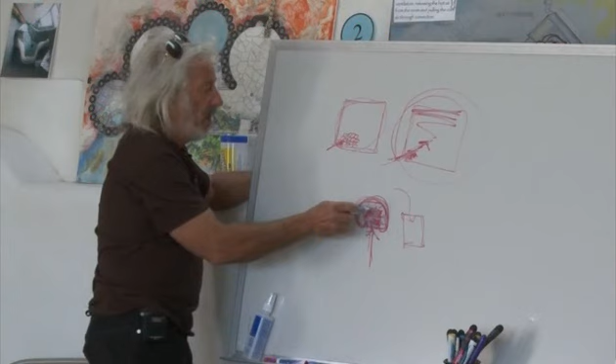The mass thing kind of came out from the physicists in the early 70s when we had the first hint of an energy crisis. All the engineers and scientists were trying to build mass into houses. We were already fooling around with building houses out of beer cans, so we looked around at what else there was a lot of on this planet, and it was tires. And we started stuffing dirt into tires and then beating it into tires.

And so you have a tire that is a steel-belted rubber casing, and you beat it full of earth. You have a 2.5 foot thick chunk of mass encased in steel-belted rubber. The material that you're using is dirt, which is everywhere. Tires are really everywhere. Tires are indigenous to the entire planet. If you came here from another planet and saw all the tire piles, you'd think they grew here just like trees. And in fact, they do.

I mean, we've been everywhere. Bolivia, India, everywhere we go, they've got tires, just like they have trees. So they actually have a problem with tires. You never hear anybody saying there are too many trees, but you do hear people saying there are too many tires, and too many people probably. But anyway, tires are indigenous to the entire planet. They are a great, massive way to build. They're low tech. They don't require equipment. They require very little training.

So when we were trying to evolve a method of building a mass building, we stumbled onto this, and that was 30 years ago, and we really haven't found anything better. In other words, if I found some better way to achieve a massive structure, I would use it immediately, but I haven't. And when you put all these criteria together, it's really almost unbeatable. The fact that they're indigenous to the entire planet, that it's low tech, that it's getting rid of something that we have a problem with, that it is structurally super.

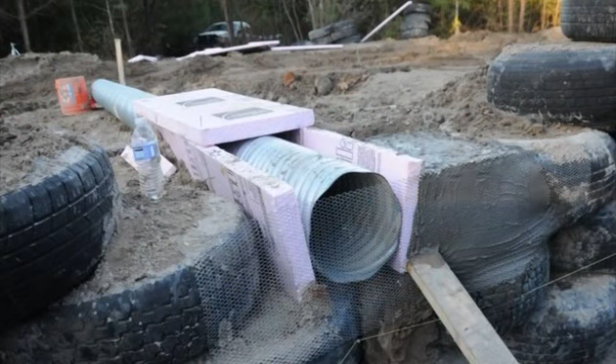And people would sit around this at lunch because they're coming in from working outside in 105 degrees, and sit around these tubes and put their bottles of water in them and all kinds of stuff. You could see it was working. And this is with no fuel. So now we've taken this configuration that we got busted for a decade or so ago and taken it further, removed the heat loss of the skylight, created even better ventilation, and done one more thing.

We do now what we call a thermal wrap, and you can see this. I think we've got one under construction called the Global across from Corner Cottage. Thermal wrap is we take rigid insulation and go out another 3 feet from the tires. And so now we have trapped more actual earth mass to work with the tires. The tires become the structure and mass, but we're adding another 3 feet to that mass

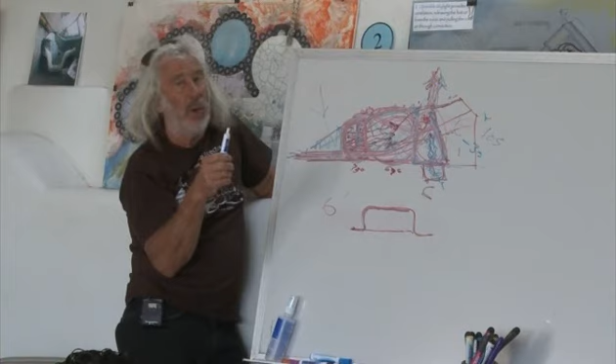And the reason we call it the package design is because it was so simple that we could provide a kit almost that people could just put together, and we could make components. So we were aiming at making this more user-friendly, because these older buildings had a lot of strange details that required more skill. So we were trying to make it so that you could just assemble this building. And they worked pretty good. We did a lot of them.

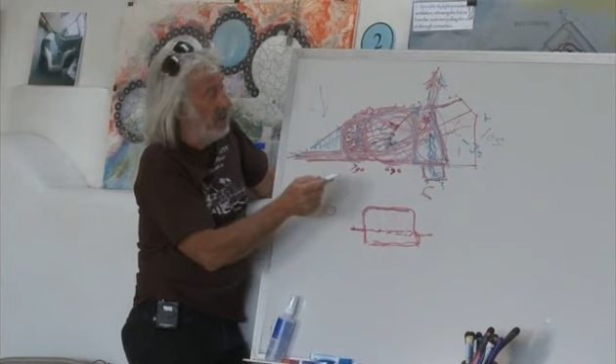And then we added a double greenhouse to it. And then we got rid of the sloped roof because we decided we could heat the roof with solar rather than having to have it shaped to face the sun. And so the package then evolved into a double greenhouse package, and that evolved into what we call the global Earthship, and we've got a lot of these going around the world now.

And we can do one of these, like we just came back from Miles City, in Montana, where we put one up in 8 weeks, totally turnkey, everything working, 2-bedroom. And so we got the time down, we've got it to the point where this is a product now that we're ready to take out there.

There are 6 points to these buildings, half of which at least I'm going into tomorrow, but everybody's looking at carbon zero these days. And so building with recycled materials is a huge thing. That's part of the rationale for using tires, but not the only rationale for sure. And the cans and the bottles. We were doing that before we were doing anything.

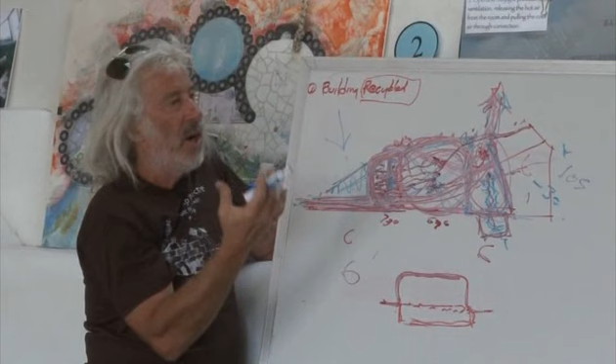And building buildings out of cans just because the media started screaming about garbage being thrown everywhere, 30, 40 years ago, and it hasn't stopped. So we were doing that before recycling was even a word. So in terms of a carbon zero building, if you're using a material like tires or bottles or cans that is taking the place of a manufactured material, and that manufactured material takes energy to manufacture, you're starting off with a material that doesn't have to be manufactured.

There's a double thing there. It also takes energy to do something with the cans and tires and bottles. So you are getting rid of that energy because you're using them rather than using the energy to get rid of them. I was in Norway recently, and they have a giant recycling company, but the energy that is used to recycle all these materials is unbelievable, really. And then they ship them somewhere.

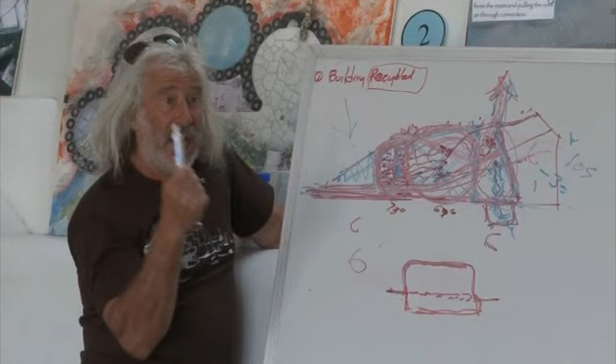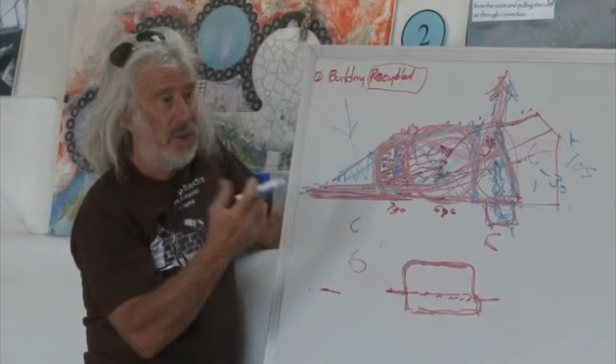So you're taking the place of shipping because you're using a product that's laying around. You're taking the place of manufacturing because you're using a product that's already manufactured. And you're taking the place of disposing of garbage because you're using garbage. So there's 3 ways that these buildings start off with actually a negative carbon footprint when you're going out there and pounding dirt into tires. So it starts off with a negative carbon footprint because of building with recycled materials.

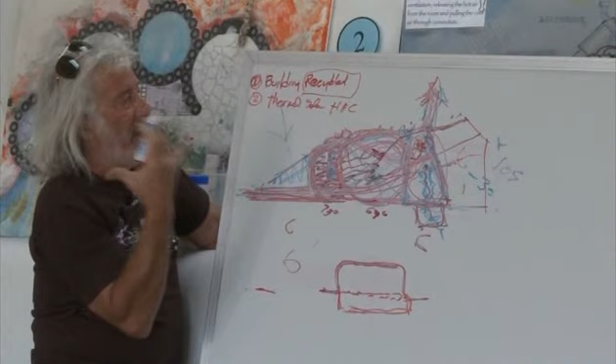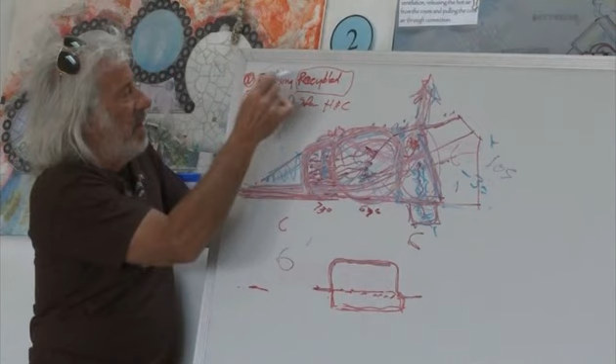Then thermal solar, which is what I've just been talking about, heating and cooling. These are the major points of these buildings. Thermal solar heating and cooling, building with recycled materials, and so the design of the buildings is a result of what it takes to use recycled materials and what it takes to achieve thermal solar heating and cooling, and you can see how it's evolved. And then solar and wind energy, of course, which we'll go into tomorrow. Water from the sky, harvesting water.

And then contained on-site sewage treatment. Contained sewage treatment. And so this is getting you off of the grids. And sewage treatment is getting to be a big deal because they kind of halfway treat it in sewage treatment plants, which again takes a lot of energy. And no pun intended there.

So it takes a lot of energy to treat sewage, and sewage is a valuable thing. Sewage to me is gold. It's compost. It's providing energy for food, which is the sixth point, food production. So if we can make a building that addresses all of these issues, who needs the government? Only to hinder us from doing it.

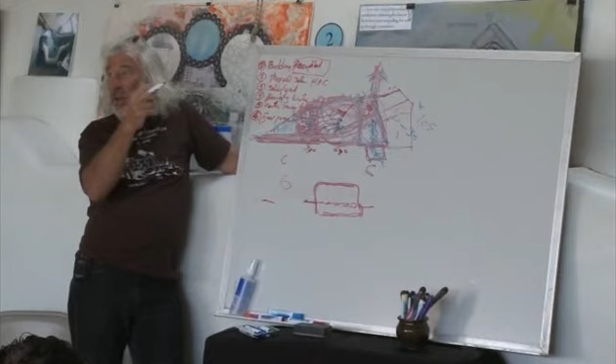Doesn't it also regreen because the black water plants grow that wouldn't normally grow in a... Yeah, and you'll see, I don't know if Kirsten had it in the slideshow, but if you get to see some of the older Earthships, I have a great picture in one of my shows that shows one of the buildings here, and you've got the barren, deserty mesa, and it might even be in one of these posters, but his blackwater system, which I'll go into tomorrow, has just gone off.

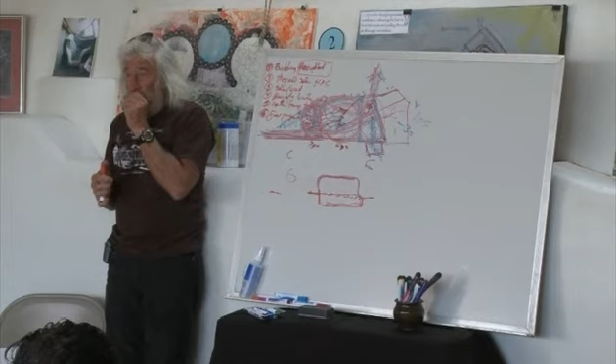It's like a big oasis of green with birds and owls and creatures living there, and then you see the periphery, all the barren mesa desert. And so these buildings actually cause green to happen. And that's because they don't throw their sewage away. That's because the sewage is gold. The sewage can give you a green surrounding. So the regreening of it is definitely an issue.

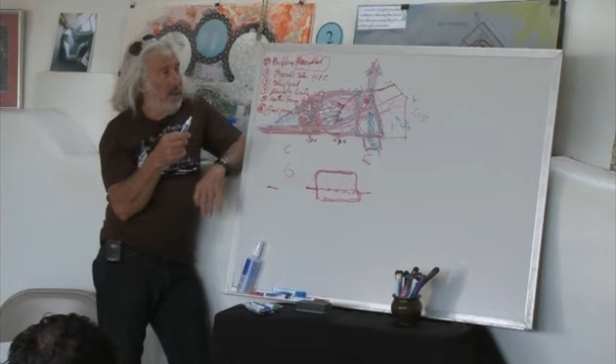But just think of this in terms of the issues in the cities and other countries. How much of a garbage problem there is. New York City's taking it out in barges and dumping it in the ocean. Everywhere I go, the first thing they do is they take me to the dump, and there's mountains of tires and bottles and piles of refrigerators and ranges and things like that. And we've got ways to use all of that. I imagine Kirsten showed you how we use the washing machine refrigerator panels. That's new in the last 4 or so years.

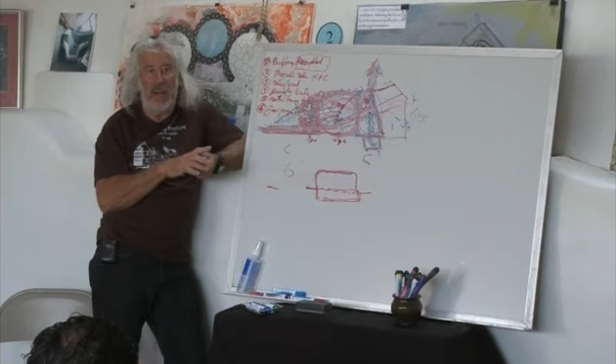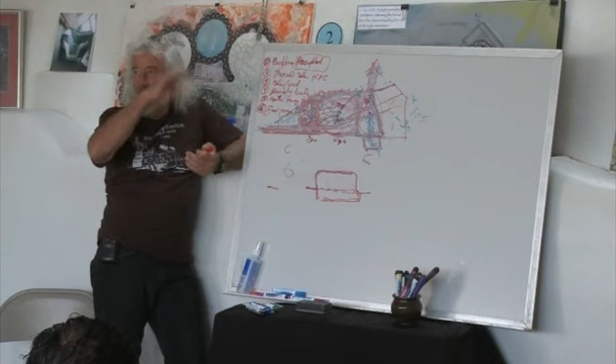I was in Hawaii, talking to grade school kids, and they took me to the dump, of course. It was the little island Molokai, and there's where I first got this idea. There was a big mountain of refrigerators, ranges, washing machines, appliances that went bad. And we had been switching our roof material to metal because metal catches cleaner water. And this mountain of washing machines, they're all full of these baked-on enamel, yellow and green panels of metal. Nice colors and everything.

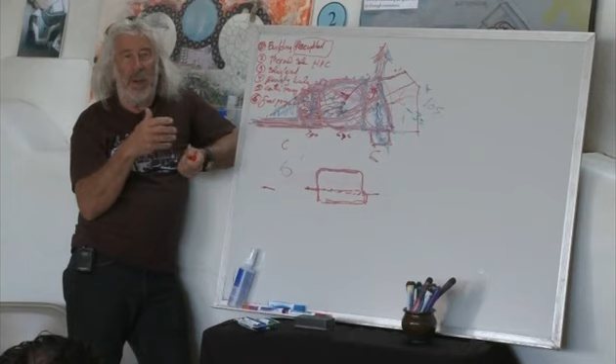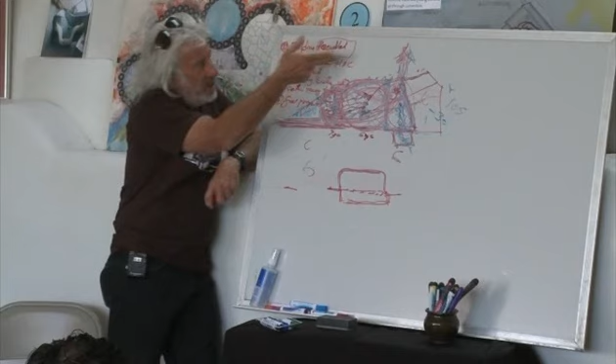So after I came home from that trip, we went to our dump, and sure enough, there was a mountain of refrigerators and ranges. So the crew went out there. We took a solar array and a solar trailer so we could plug in these electric snippers. If this is a panel on a washing machine, you just stab the corner of it, make a hole, take the electric snippers and snip, and you got a panel. So we just go to the dump and harvest metal. You'll see it at Corner Cottage across the street, the New Global has some of it, and the Phoenix has got the best application of it.

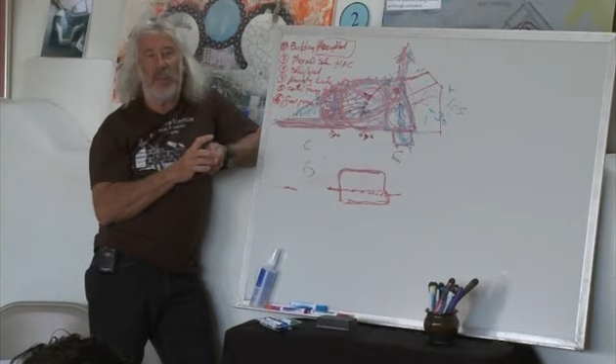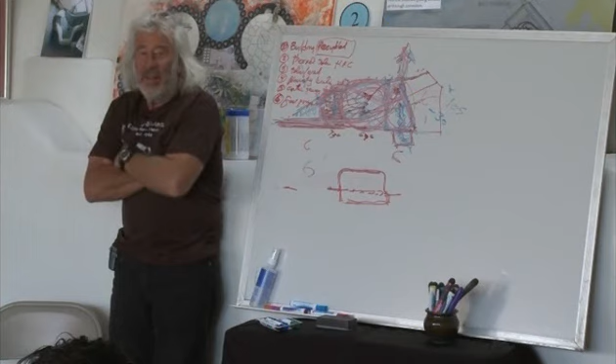It's like artwork there. As a matter of fact, I just got a 1970-something Mercedes that was all beat up, and we patched up the body with washing machine parts. It's beautiful. It looks like paint swatches that you find at the paint store. And then we found a couple of pink ones, and we really like the pink, so we paint some of the panels pink with metal paint. But anyway, we're harvesting metal now out of the dump for roofing.

And so every city and country has serious issues with garbage and what to do with it, and then when they do something like Norway does with it, to me that was scary. They had a factory of machines chewing up energy and trucks hauling it off to other parts of the world. To me, that was insane. They thought it was a great thing that they had such a giant recycling situation, but I was just seeing energy used like crazy to recycle.

All we're doing is gathering stuff from the dump, bottles, cans, tires, cardboard, washing machine parts, and we'll continue to find other goodies. So building with recycled materials is not just a logical thing. There's really good materials, and in fact, I can't find, manufactured or not, a better material than tires to build with. If somebody gave me $30 million and said, develop the best building material you can find, I'd probably invent a tire.

So it's like a super relevant issue that, aside from housing or anything, every city is dealing with. Well, then, of course, the energy consumed to heat and cool homes. Everybody probably knows that the CO2, I think they argue, between 30 and 50% of the CO2 impact is from buildings. And that's obviously largely from heating and cooling buildings.

And so if you're heating and cooling buildings with thermal solar and trying to come up with little tricks to extend that, which we're doing, then you're affecting that issue that every country and city is facing. Solar and wind for the electricity, which again is affecting, if you're replacing a coal-fired power plant or a nuclear power plant or whatever. Like when we were in Normandy, France doing one of these, they were getting ready to do two things in the neighboring area. And they were actually putting up signs and people marching and raising hell about it.

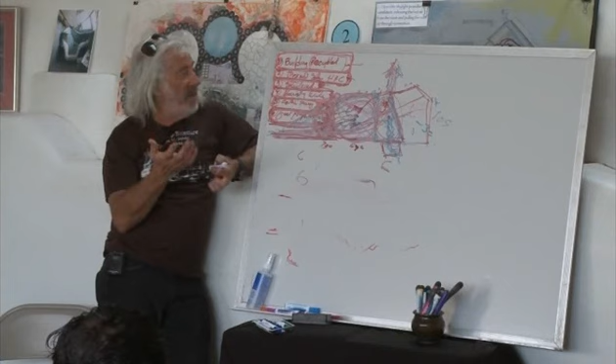Because Earthships are getting well known in Europe, with the websites out there and whatever. And so the people made the choice to take their lottery money and build a carbon zero demonstration pavilion. And it took them 2.5 years to get a permit. That's insane. So to me, this part is the fun part. We're getting it better all the time. It works good now. It's ready to roll. And where we're at now is getting it so that people can do it.

2.5 years for a permit. It took us 3 years to get one in Brighton, England. I had a guy work for 18 months. He came to me with an oxygen tank on his back. I thought he was going to die in the next week. And he worked for 18 months to get a permit in Pima County, Arizona, to get his Earthship built, and it's going up now. It's on the web.

So in a lot of developed countries and cities, it is still difficult. The further you get out in the boonies, the easier it is. And so what we find ourselves doing is trying to support people, work with them and help them through the permit process and everything.

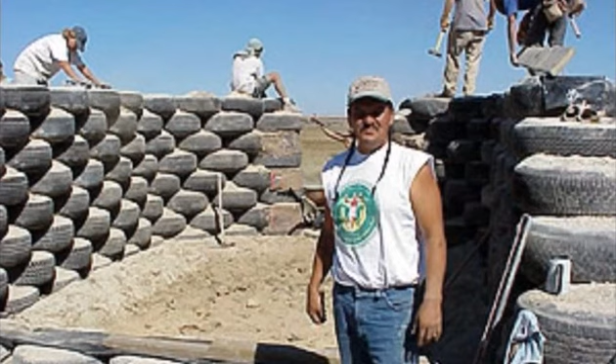But as the planet situation continues to worsen, so to speak, we're seeing that the places that allow you to do it are like third world countries and the Indian reservations. We did one up in Lakota Sioux land, and they just took us out there on Chief Crazy Horse's descendants' land and said, "Do it here." That was the permit. And so they have land now. They have a lot of money from gambling, and they've got no rules. They could take the lead. Third world countries can take the lead because they aren't encumbered by all these rules and regulations.

And in this country, we're taking a map of the U.S., and we're going to map it online because there are these places we call pockets of freedom, like Montana. This is supposed to be a free country. Well, let me tell you about it. We've just noticed this recently, but we're selling drawings all over the world and then hacking through the permit process with people, sending off engineer reports and tests and studies and all kinds of stuff. So it slows down the process of getting carbon zero building out there.

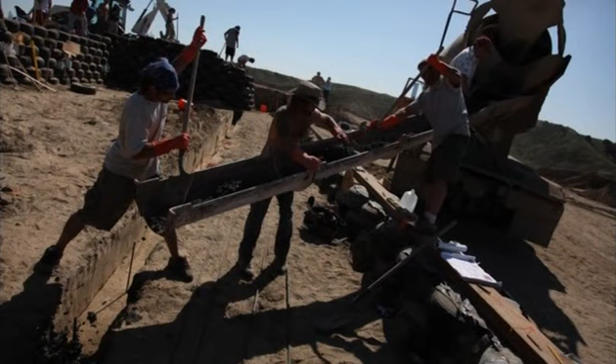And I can't really find whose fault it is. It's just the human condition has woven a set of rules around itself in the developed world to the point where they can't evolve without a tremendous amount of effort and time, and we don't have that. So it's an extreme contrast to have somebody walk in our office and a month later we're building a building for them in Montana. And that's happening. It happened twice in Montana, now it's happening in Texas. So what we're going to do is map the counties in every state, because in this county where we did this building, Miles City, you don't need any permits.

In Montana, is the governor Schweitzer? Does he know what you guys are doing? I'm not sure. As a result of our build there, they're wanting us to tell them about our gray water system and things like that. But everywhere we go, it gets in the paper, so I imagine they're aware of it.

We're not sure whether we're going to do harm or good by pointing this out, but you take Montana and Idaho and the Dakotas and you start coloring in all these counties where you don't need permits. And now in Texas, East Texas, no permit needed. The guy from East Texas came in and stayed in Corner Cottage a few weeks ago. We're going down there in 3 weeks to throw up a building for him. No permit needed.

So what I'm saying is green carbon zero housing can, boom, exist instantly in lots of places around the U.S. This is almost like the maps they make of the Democrats and the Republicans. You've got the map of where you're free to take care of yourself and where you're not free. And it could be that a lot of people end up moving because it's beautiful land. Some of the most beautiful land in the country is what they say is worthless because it has no utilities, and because it doesn't have any rules and regulations. There's a lot of that in this country, and a whole lot of it in the rest of the world. Europe is one of the worst, but there are pockets in Europe too.

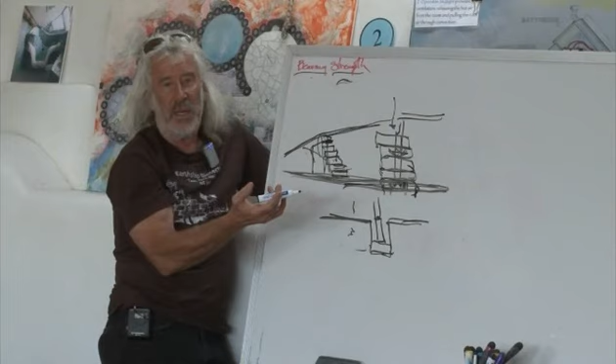So in a buried earthship, we recreate the frost line to the point where it has no effect on the building. How about the greenhouse? Then the greenhouse out front usually has a couple of tires, and sometimes 3, and we put the leaning face on the greenhouse, and then we insulate that and out a little and bury that, and it's the insulation again that keeps the frost line from getting into the bearing of the tires.

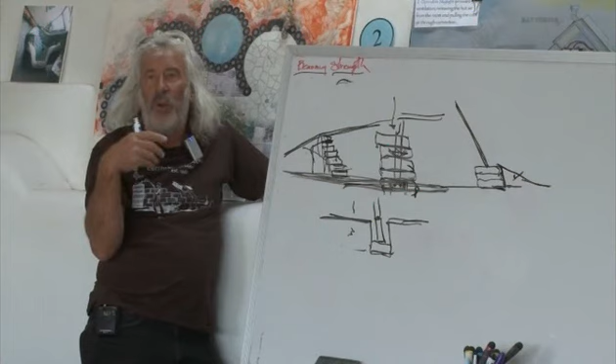And at another point, a concrete footing is brittle, is rigid, and any heaving will crack it. If you did get heaving on a tire wall, there's no way it can crack. It's resilient. It's hard, but it's resilient, because it's earth. Over time, earth is more liquid than it is rigid. And so any heaving that would happen is not going to have much of an effect, if any. And we still block it with rigid insulation.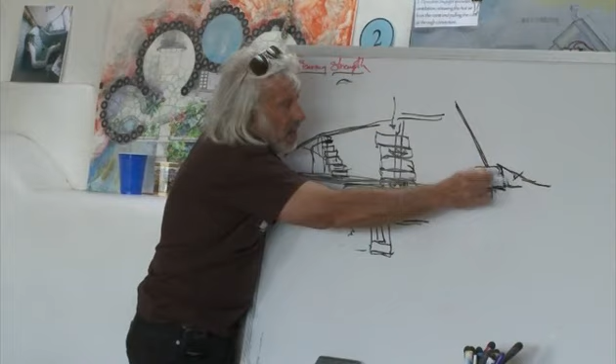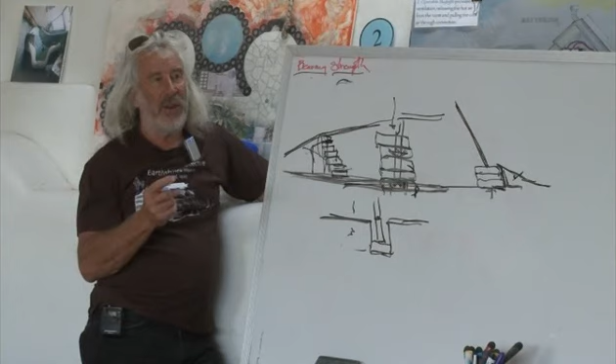On the vertical bearing strength, have you ever calculated pounds per square foot? We have an engineer report that got into that. I read that, but I couldn't see any. I don't think they have come up with a max of what it would take, other than the concrete truck on the tires pretty much. I mean, that's going to be 2,000 square foot.

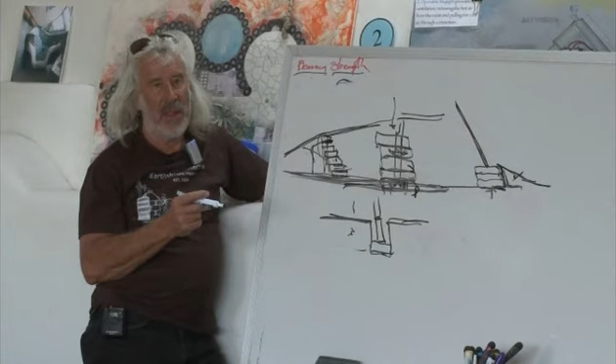What are the considerations about putting earth over the roof? Oh, so we've done them. In the old days we would do that. It's nice. It's a soft situation. I'm into the aesthetic effect of these things being as soft as possible.

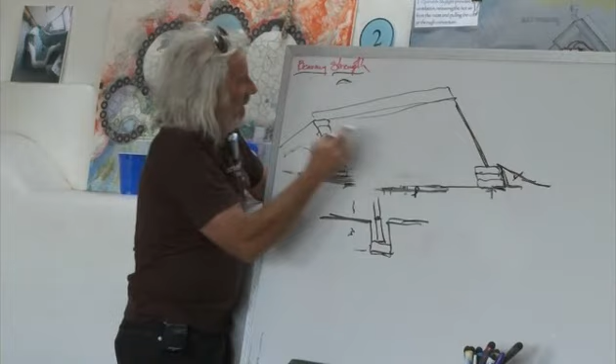Burial, roof structure, insulation, and in a case like you're talking about, you bury the roof. Now the reason we steered away from it was, one, we started observing that for a person standing in a room, the ambient temperature they're going to feel is coming off up to their head height, and that's it, because this is all about ambient temperature, not like a forced air furnace or anything.

And so having mass above your head doesn't really achieve anything. What it does do is make your structure have to be a whole lot heavier to support it. And when you have grass on your roof, you don't catch near as much water. And in an area like this, that's why we've gone to metal roofs, is because the metal roofs are so sensitive that we have seen the gutter dripping into the cistern from morning dew. And you won't see that on a grass roof because it gets absorbed. So due to water catchment, weight, expense, and lack of effect, we don't do grass roofs anymore.

What you will see if you walk around, and I'll go into this more tomorrow, the roof on this building was a material called Brai, and it goes on with a torch, and it catches really nasty water, so we put acrylic coatings on it to make it catch cleaner water, and they peeled off, and then we spray foamed it, which you can't get all over the world, so this was a learning experience. The next building is the EPDM material. It's a rubber. It catches pretty clean water, and it lasts 10 or 15 years, and it's going to need repair over there on that one pretty soon.

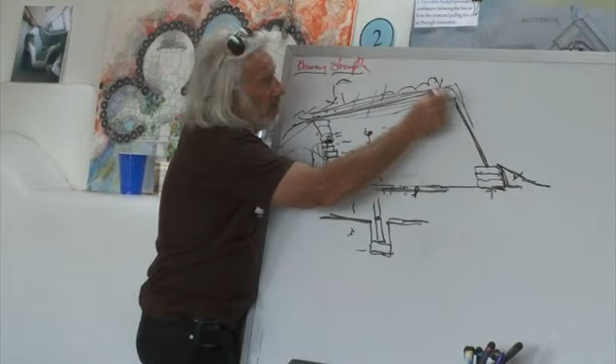So with the metal roof and that's facing north now, in the winter does the snow still melt? Well, I'll go into that more thoroughly tomorrow, but since you asked it, I'll answer that part of it. This building was old school. Kirsten probably showed you up at Reach, the steep community in the mountains. They get more snow up there than down here. There'd be 2 feet of snow on the roof, and the roofs were north facing, like that. The glass on the front was south facing. And we'd get 2 foot of snow on the roof, and we'd just watch it evaporate, no water. And we had one other roof that just by chance, due to the mountain, was sloped this way. And we watched that roof on a day like today, melting and water running into the cistern. Observation was a south-facing roof is going to catch water, a north-facing roof is not.

So we changed all of our designs to do this south-facing roof, kicking back up with the greenhouse, just like here. It could be very subtle, we observed, to get just a bit of sun rays on it to melt the snow, kicking back up at the winter sun angle to still get the heat, created a valley which caught water. But due to our inexperience in water catching roofs, if you've got a roof like this, you can make a mistake and you may have a drip. If you've got a roof like this and you make a mistake, you got water on a coffee table in a living room in a lawsuit. So, back in court. So this is just more expensive to detail.

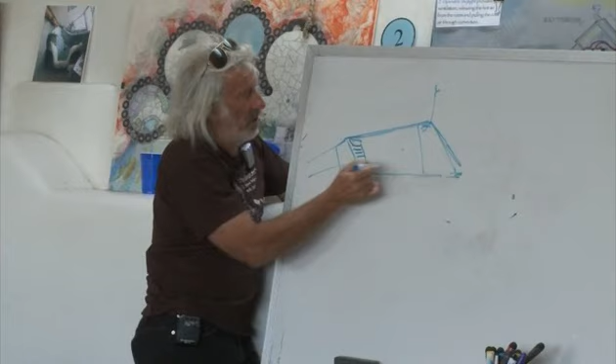For instance, getting back to our same old global Earthship here that I've been drawing all morning, with the battered wall, the thermal wrap, the now south-facing roof that we've explained, the double greenhouse, and the convection engine and the tubes and all of that. Then I apply that to what I do. The first thing I do, when a client will tell me where they live, this is what I start with.

But then I get the annual rainfall. If they have a lot of rain, that means I can have smaller cisterns and probably have to have more solar panels. I also get the rainfall, and I get the winter low and the summer high. Now, here our winter low is 30 below, not sustained, but every once in a while in the night in the winter it gets down there early morning. And summer is 105 or something like that, 104. So if you've got a winter low of 40 below, I collect that data.

You got a winter of 40 below, but another thing I get is the number of sunny days. We have here 300 sunny days a year on average. Someplace in Maine may have 35 or 40 below, similar to us, but they have 200 sunny days a year, or 190. So that information tells me how to tweak the design.

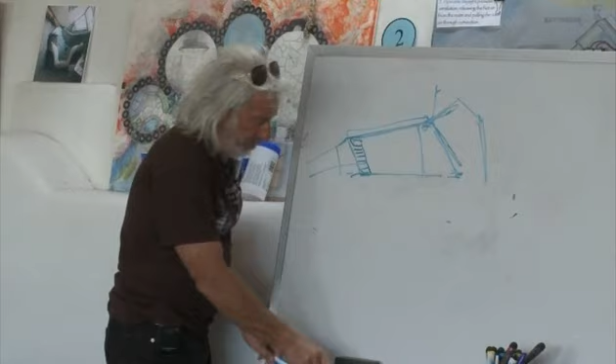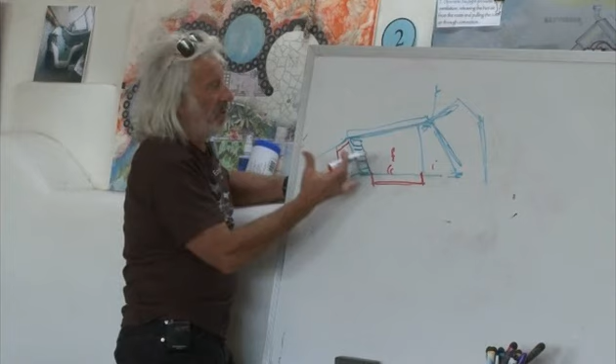So in the serious situation, I would say probably add the third greenhouse. You'll see it at the Phoenix. There are places in the Phoenix that have the three glass faces. Then the thermal wrap that we put around the building to insulate the mass, we would take it and put it under the floor, just in the living area where the people are. We don't need to put it for the plants, but you'd go down and insulate about 18 inches, because you're trying to stretch all of these aspects to give you a little bit better performance to make up for the lack of sun. And so there are tricks like that.

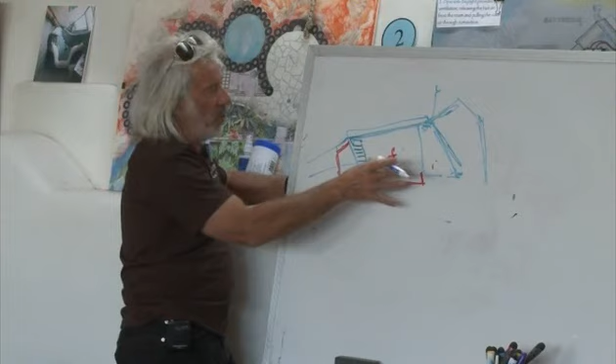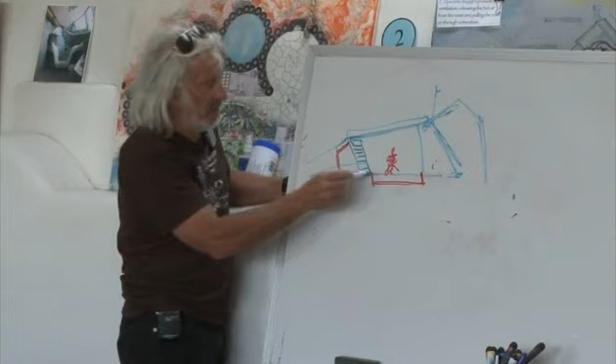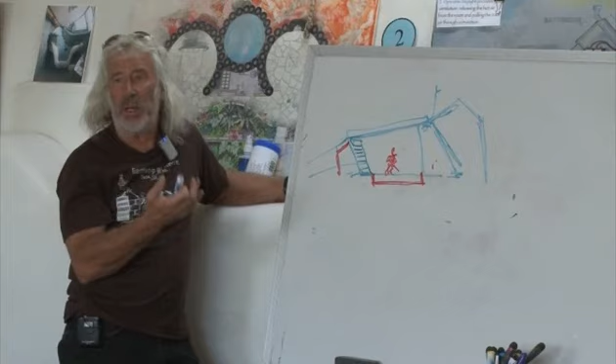The things that are adjustable are a few tweaks on insulation, greenhouse. If you have less sun, then your power system, which I'm going into tomorrow, gets into more panels. Like we did one in Vermont. We did insulate the floor like this. We just simply doubled the power system. We found out that they have about half the amount of sunny days as us, so we actually put two full-on power systems in. And that's interesting because these power systems are designed for Earthships. You can't take our power system and hook it onto a regular house because a regular house has a lot more demand.

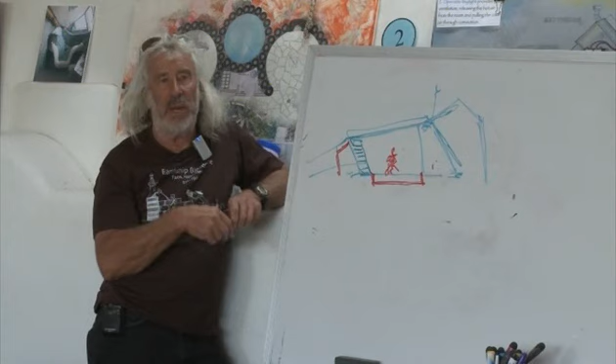The things that we encounter have taught us to point that out to people. We built one of the early buildings before they were called Earthships, pit houses, which worked similar, but it was just before we copyrighted the name Earthship. And the people moved in it, and everything was working. Well, they called up one day and said, your power system is not working. So I talked to them on the phone for a while, quizzing them, trying to troubleshoot and find out why. And they said, well, we got some guests. And I said, well, guests can tax the situation.

They said, well, it's not really hurting anything because they're over here in their Winnebago right next to us. But the Winnebago was plugged into the house with all of its fans and refrigerators and everything. So it took me an hour phone conversation to find out that they had plugged a Winnebago into the building. The power system is made to run the building. It's not limitless power. So lots of things like that have happened, so you have to point out to people, this power system is integral to your life in your home. And if you plug in your Winnebago, it's not going to work.

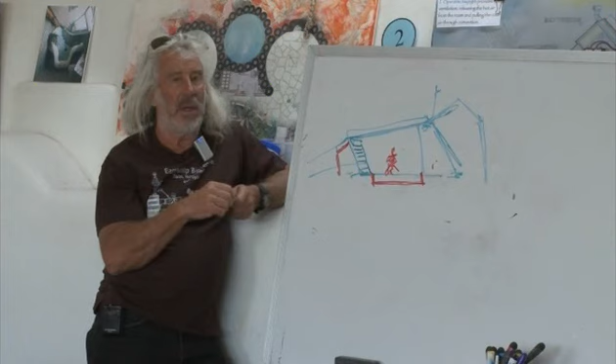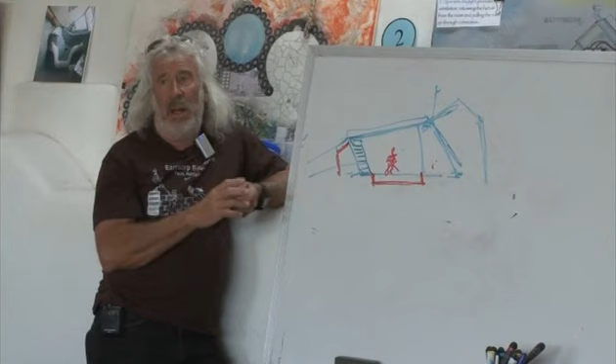Yeah. In your opinion, I know you built these all over the world. Is there one climate that's easier to build an Earthship in, that makes it cheaper, easier, that makes it perform better, if you had to choose one? Obviously, I think sunny climates are easier because you can get more power, more energy. Sunny, cold climates. But we've done them so many different places that our effort is to make them a universal design that can take care of people anywhere.

And we used to have, as you can see, all these different designs, which are really going to go away in our new education facility because we're going to be presenting the current situation more. But we've gone through so many different designs, and they were all evolving due to all the different climates we were encountering. And we started seeing that if we can standardize a design that just gets tweaked for every climate, it becomes more available to people. Because that's the big thing: whatever you do, it's got to be easy for people to get it, to acquire it, to build it, to buy it. If you get too much custom and tailoring, it just makes it too expensive. It keeps you from standardizing.

The automobile industry, all the different industries have done a good job of standardizing their product, no matter how bad the product is. They've standardized it so people can get it. And so we learn from that, because part of getting something out there is making it so that people can obtain it somehow. Somebody had a question over here? Yeah, I was wondering about glass technology.

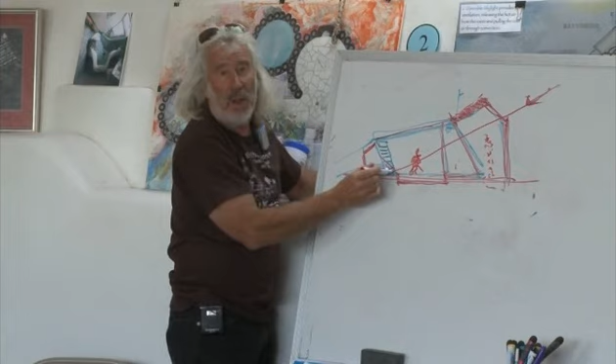So in a northern climate, I match this line with the winter angle of the sun so that this structure, this is glass, this is insulated structure, so that the sun makes it all the way into the house still. So I don't want to block any sun by this buffer zone. I just want to trap more temperature so that this minus 40 degrees is not felt all the way in here where the people are. So I'm still trying to get the sun in.

Wouldn't it be cheaper to just go straight from that highest point to the lowest point in the back and not have that detail? Like this. Yeah, like why not do that? Well, if you're going to do it from the get-go, yeah, that could be structured. That's one way you could do it.

But in our efforts to standardize, since this global model is worthy of standardization, this is an add-on to the global model. So rather than change the whole structure of the global model, we can keep it standardized and add this. And when you do add this, you find that you have to adjust it. So you'd be dealing with a separate set of drawings for every latitude, and we're trying to avoid stuff like that.

I actually have 3 questions. One, can you talk a little bit about what affects room depth? If you have a U, I think Kirsten was saying you have the ability to go a little bit further from the greenhouse. Yeah, well, room depth was in the early days a discussion, because if you have a mild winter, then you can make the U's pretty deep because you're not getting that cold. And in fact, it's cooler back here in the summertime.

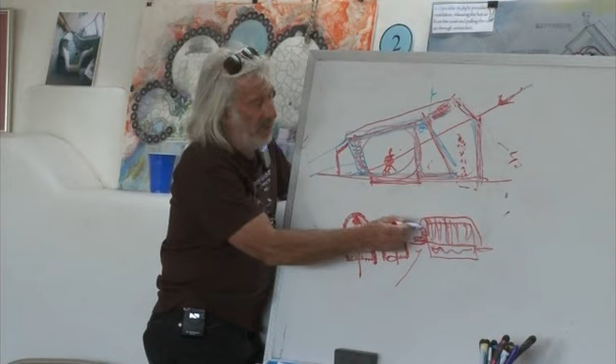And so when we first came up with the package design, it was this way. It was a lot cheaper. It was a lot easier. It was aimed, though, at being easier to put together. And we thought that we're going to sacrifice some performance by making this thing easier to put together. It turned out that those package buildings really performed well.

It's back into custom situation. There's nothing wrong with the U's except that there are more details to build them, therefore more time consuming, therefore more expensive than these. The whole building is wrapped in the twice as thick wall. And so what I'm getting at here is that structure, thermodynamics, and price all go into equally determining the design of this building.

So a couple of other questions. When you modified the design of this global design, you've got the vegetation now in the front greenhouse, at the roof level. Are you trading off these skylights then? Are these skylights just not part of the design? Well, they're gone. I mean, they're nice. They're cool because you can lay there in bed and look up at the stars. But see, the buildings are more shallow than this.

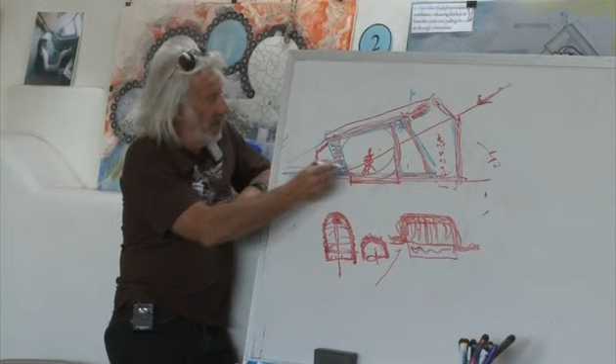So you go in the corner cottage, or there's a couple of globals that are built. You're going to find that they're just as light as this room. You don't really need that light. They're just as light because they're shallower, and they're actually cooler because now the air comes through the earth. See, if it's 105 degrees outside, the air coming through that window and out this skylight is not really anything but fresh air.

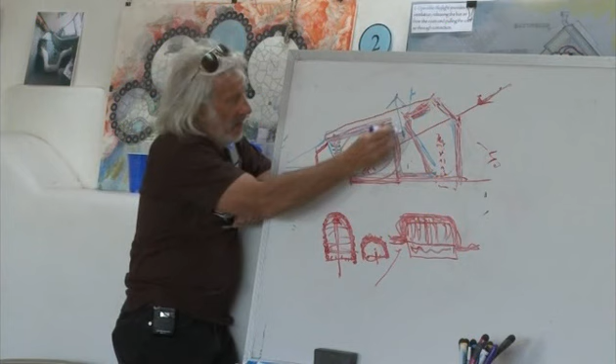Whereas if it's 105 degrees outside and we open up a convection-driven air current that sucks this air through 8 feet deep, 30 feet long of buried dirt, you have an air conditioner. Up in Montana, it felt like the air conditioner in your car hitting you in the face. And so we have better movement of air, cooler air, and no openings in the roof.

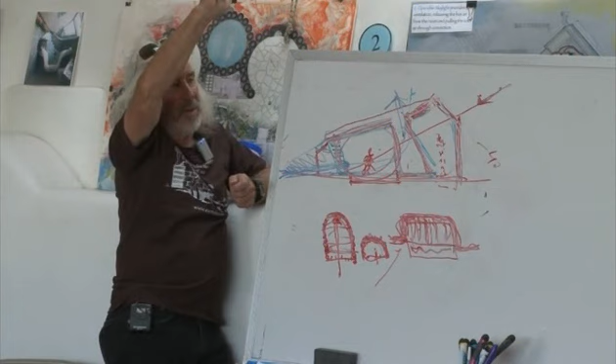Like you go up on the roof of some of these newer buildings, you're seeing no detail. Detail is money. Detail is time. We're after the thing. So what I'm saying is time and money do affect design because that's going to make it available to more people if it's not full of detail. Like my original, and I still look at things this way.

First of all, I want it to work. Like we're working on this heat bulb thing now. I don't care what it costs, what it looks like, how much space it takes up. I want it to work. I want to be able to put one in a corner of a room in Norway and have it emanate heat. And I'll stop at nothing to get that.

But then after I get it working, then I'm going to try to make it affordable to people to buy and easy for people to acquire and on and on. So the first designs that we had with the overall building were, we don't care what the building looks like. A lot of the ones Kirsten showed you looked like they landed last night. They weren't marketable, but they illustrated to us that you can do this.

So I keep that thinking as I go through, to get more into your question too. Whatever it takes to make it work without fuel, I will do it. Then I will try to take it into the economics and the simplicity of making it more available to people. But there's no sense in making it economical and available to people and easy to put together if it doesn't work. I've got to go through the making it work process first. And that process is at all cost.

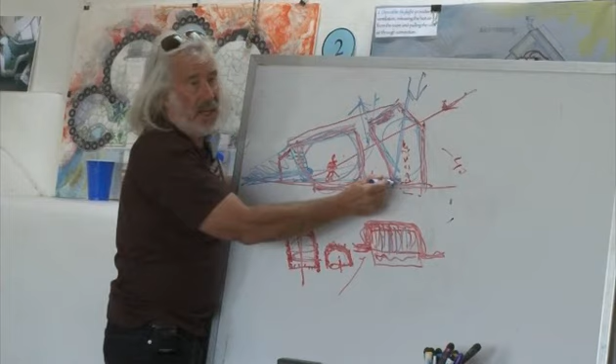I would add the greenhouse, because not only is this greenhouse a buffer zone for keeping the cold from finding the internal living space, it also keeps the heat. And usually in the summer, the sun's higher, so this thing ends up blocking any sun from entering the first greenhouse and the living space. And when you block the sun, you're in shade. And you can still play the convection game out here.

We put skylights in out here. And if this greenhouse is in shade and this one's in sun, then you close these skylights, open these, pull the air through the whole damn thing, and you still got the convection engine, still got the cool air coming through the earth, and you got no sun. So you're playing with your sun angle, and we're trying to standardize a depth for structural and economic reasons.

People will say, you know, why can't you go 30 feet with this? Well, then you got to change the whole structure. You can customize till you're blue in the face, but there's no real reason to do that, because you can stay cool without going deep. Sometimes I would consider popping out a little earth room on the back side that's really an inner sanctum, you know. Yeah, it's a custom thing, but largely custom is just an additional cost.

Yeah. We have intentions of bringing this technology to East Africa, and I believe the area where we operate may be the only area in the world where tires are actually a commodity. You can't find them. No, you have to be, in India.

What's that? In India, they are a commodity. Okay, really? Okay, well, thank you. But, so, I mean, what would be the best alternate to using tires for your mass?